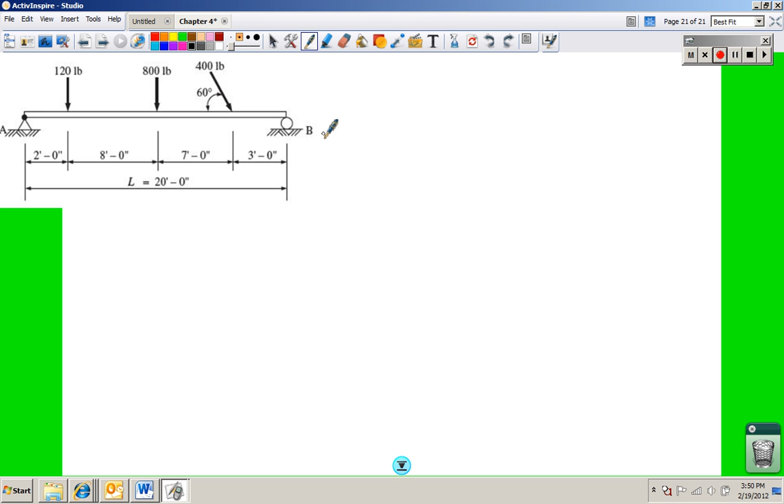The pin connection is going to have two forces, an RAX and an RAY. The roller is only going to have one reaction force, and that will be RBY.

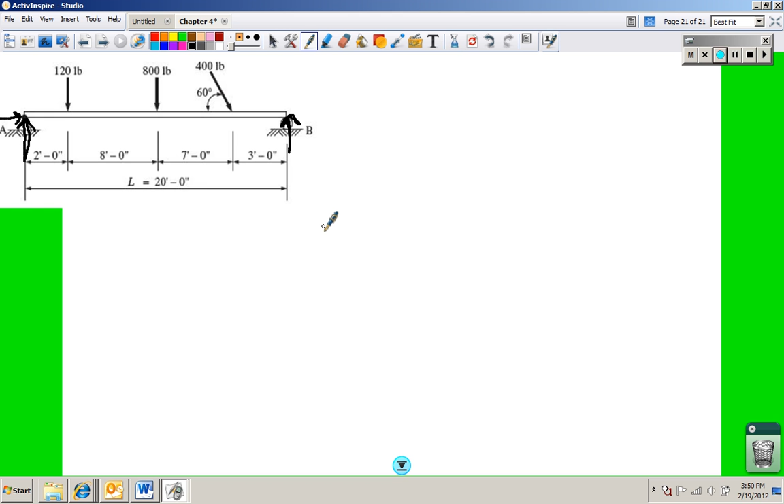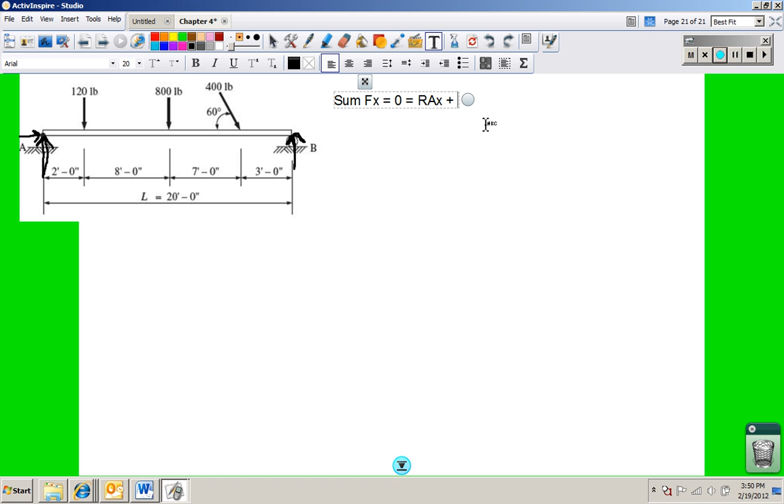So we can start by doing sum of the forces X are equal to 0. So we have RAX going in a positive direction, and then we have, this does not have an X component, this does not have an X component, this does. So that would be the X component of that force also going in a positive direction. We normally denote going to the right as positive.

So it would be 400 pounds times cosine of 60. Alright, so then we end up with RAX is equal to negative, and now I just need to plug in 400 pounds times cosine 60. Okay, and that is in fact equal to negative 200 pounds.

Okay, what does that tell us about RAX since it came out negative? I drew it in the wrong direction. If you look at it though, because this is the only other X component force, it had to be going in the other direction. But I intentionally drew it backwards so that you could see that.

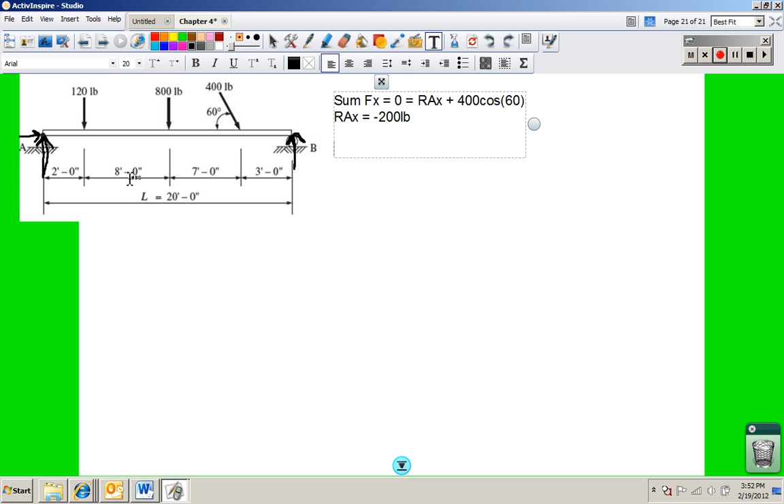Now if I write RAY, that's not really going to help me very much because I don't know RAY and I don't know RBY. So it's awfully convenient if I just go ahead and write the sum of the moments. I can write the sum of the moments around A or B, but I think I'm going to go ahead and do the sum of the moments around A because there are two forces at that pin connection.

So the sum of the moments at A are equal to 0 because it's in static equilibrium. So RAX and RAY don't contribute. We're still using the notation that counterclockwise is positive.

This 120 pound force is going to cause a clockwise moment, so it's going to be negative 120 pounds times 2 feet. The next force will also cause a negative moment, a clockwise rotation, 800 pounds times 10 feet. Now the 400 pound force has an X component and a Y component.

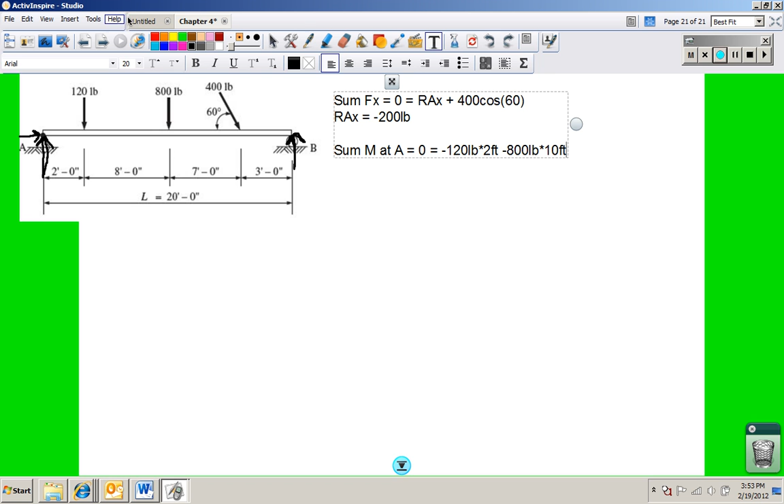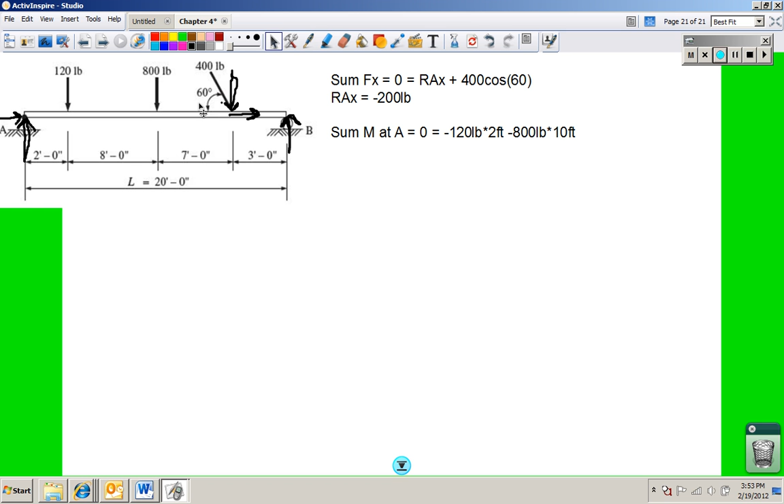Here's the Y component, and here's the X component. The X component is in the line of action, so it's not going to contribute, but the Y component will. This little arrow is really there just so you'll be sure to understand the point of application.

So let's go ahead and add that. That's also a negative moment. So it will be negative 400 pounds times, 8 plus 7 plus 2, 15, 17 feet.

And then the last one would be RBY, and it's positive because it's going to cause a counterclockwise moment. If I was pinned, had my thumbtack in point A and pushed up at B, we would want to go that way. So that would be RBY times 20 feet.

So now I just have to plug in and solve all this. Let me work on my calculator here a little bit. Oh, you guys notice what I didn't do? I didn't make this the y component of that. I needed to multiply this also by the sine of 60 degrees. Just noticed it when I was putting it in my calculator.

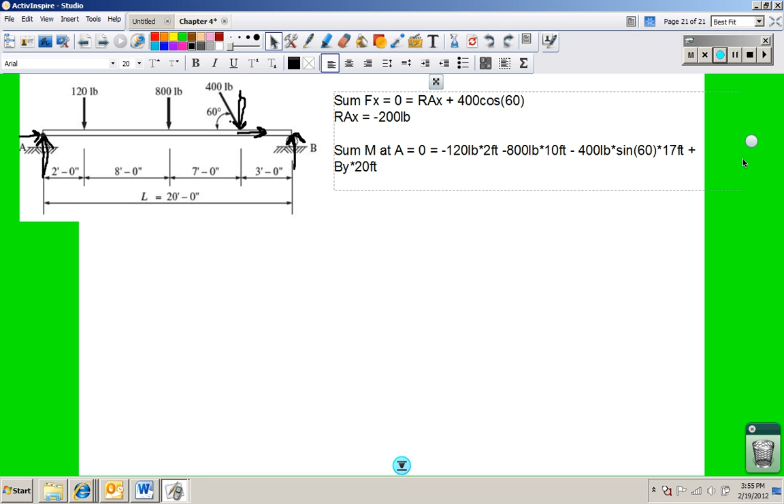Alright, so I get that this whole thing is equal to, here we go, 0 is equal to negative 14,129 pound-feet plus RBY times 20 feet. So when I rearrange that, I get RBY is equal to 706.4 pounds.

I'm sorry, excuse me. Okay, sorry, I'm back. Now we need to find RAY. So we could just do that with a simple sum of the forces Y.

So we've got RAY minus 120 minus 800 minus 400 sine 60 degrees plus RBY, which is 706.4. So RAY is equal to